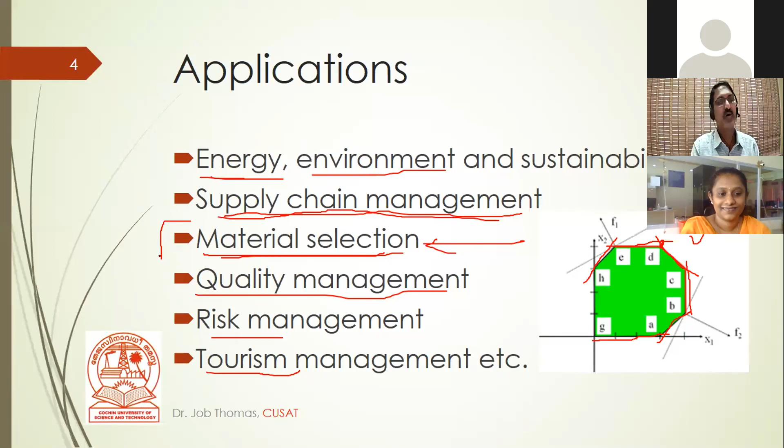Risk management, the low risk path can be identified, like your critical path method. And tourism management, the best tourist spot that needs to be approved can be identified. So there are so many applications for this MCDM, but out of this, today we will be discussing how it is used for material selection and index calculation.

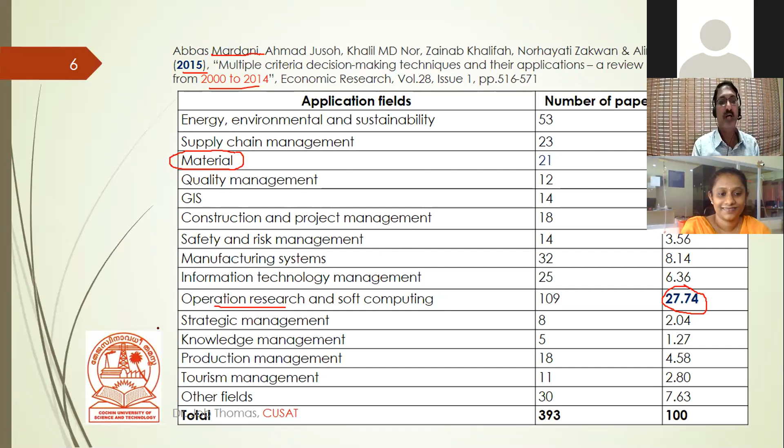And out of that, this many papers were there altogether, and 27% of the papers were in the area of operational research, like supply chain management, best route analysis, etc. In material aspects, engineers do not use this technique that much, but it is very important, especially in sustainability calculation, and that is why we have now started propagating how to calculate this score for different materials. We will discuss a case study at the end of this session, and I think you will benefit by looking into that case study.

And if you look into the literature, there are so many methods available. The very common, simplest one is the weighted sum model, then the weighted product model. ELECTRE is another technique. ELECTRE is elimination and choice translating reality. TOPSIS is the technique for order preference by similarity to ideal solution. Likewise, so many methods are available.

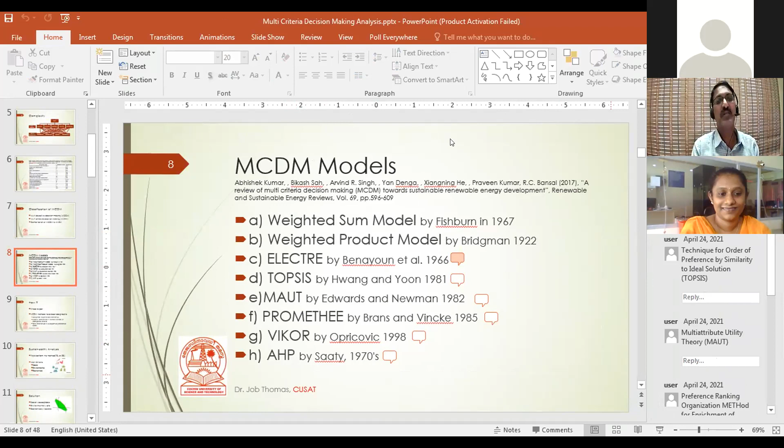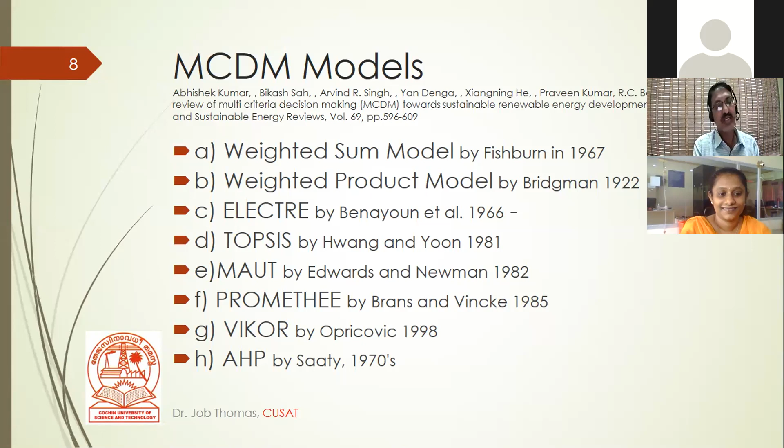At the end of the story, in all methods, you will get a score. The method of calculation is different. In some applications this method is better, and in other applications another method is better. So you can refer to these and identify the best method in your case. As we do for all problems, we go whole to part. We divide the entire problem into subparts, collect the score for the individual parts, and then assemble it, aggregate it. That is the way we proceed.

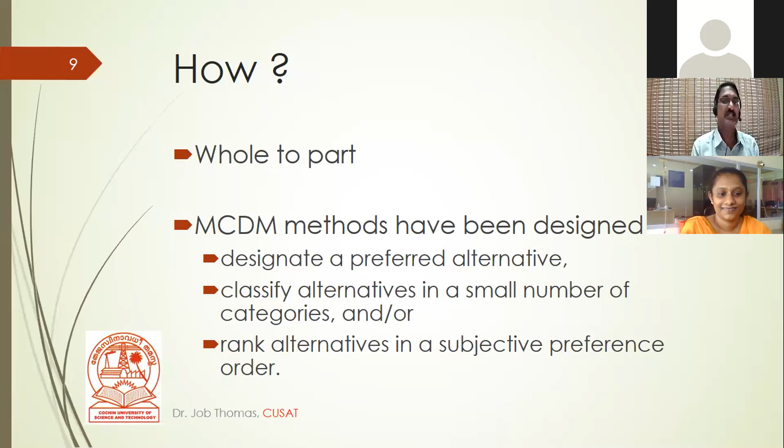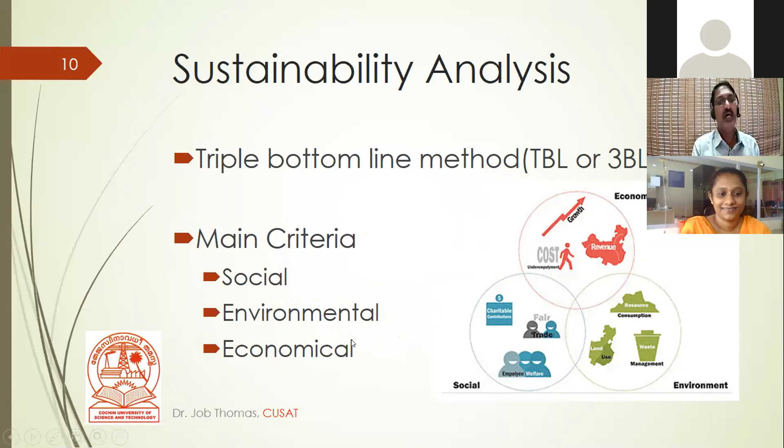In the example you will get more idea about it, and this part many people might have already discussed. Normally, we analyze sustainability based on three aspects: the social aspect, environmental aspect, and economical aspect. These three are the main criteria for any sustainability analysis. The solution is a case that is socially acceptable, environmentally safe, and economically feasible. How this is obtained in terms of a mathematical number, we will be discussing.

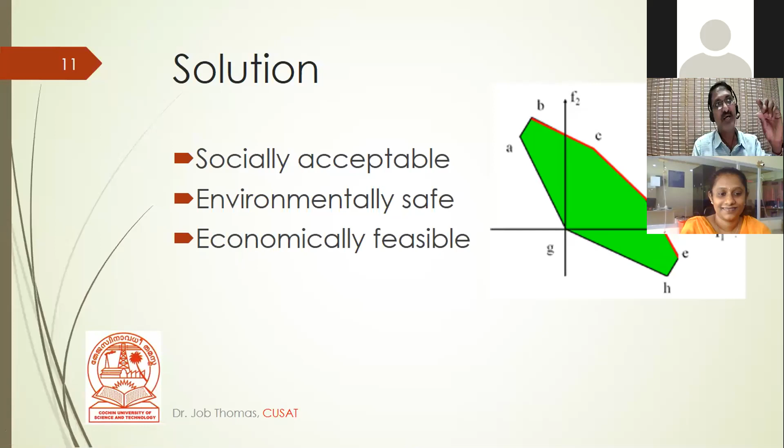This is very similar to our ANN. Many layers of alternatives will be there. You have to identify the best alternative suited for the goal. The main criteria I have already discussed: social, environmental, and economical. And for each main criterion, we require sub-criteria. And how to get the sub-criteria? The first simple method is to refer to research papers.

This is research papers. Then IGBC, Indian Green Building Council, and GRIHA, and the other option is LEED and BREEAM. So many frameworks are available. And why can't we use the same framework? That is another question. We can use the same framework when you want to do a whole analysis of a whole building. These frameworks mainly talk about the building analysis, or constructional method analysis, and the questions are arranged in that.

But when we introduce a new material, when we want to check with respect to a material which is not available commonly in all places, some of these criteria, sub criteria, or some of the questions available in the

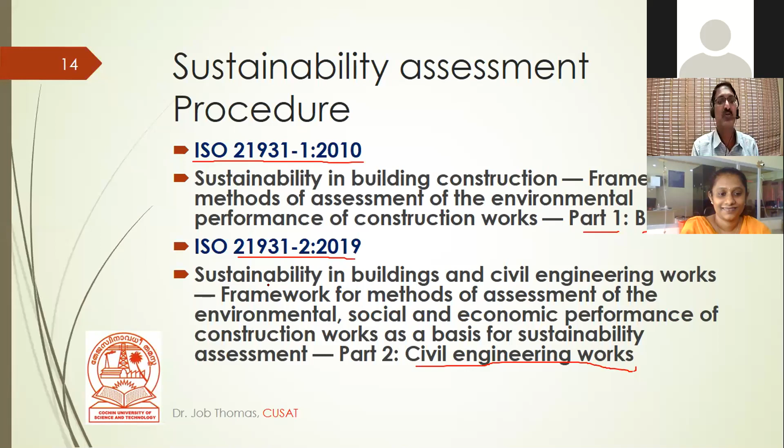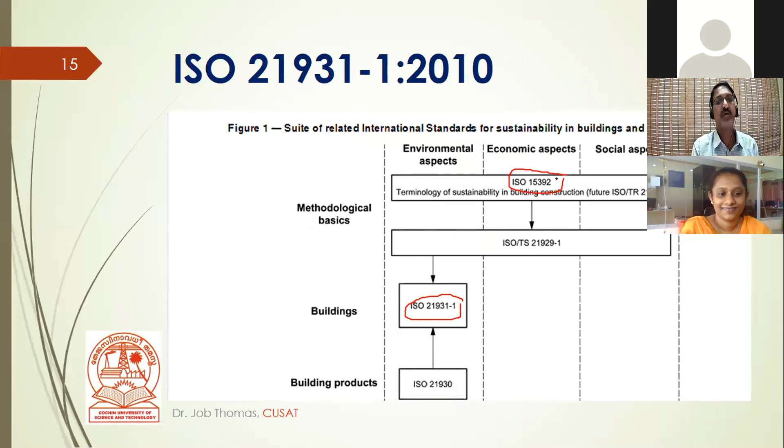ISO 21931 part 1 gives you building, and ISO 21931 part 2 gives you the details with respect to civil engineering works. So how to analyze the sustainability of a civil engineering work, different work procedures, we can do based on 21931 part 2 and part 1. Part 1 gives you building methodologies and other things. There are some other techniques; ISO 15392 can be considered. Part 1 talks about the environmental aspect, social aspect, framework, and the principles of assessment.

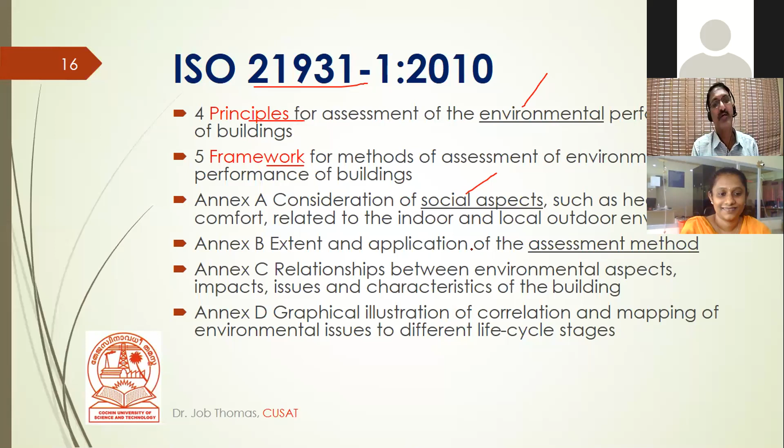And part 2, these are the topics they deal with, and that is very interesting. If you are working on the comparison of construction methods, probably part 2 will be more suitable. For comparing materials, yet another one is there, 21930, and they talk about PCR, product category rules, life cycle analysis, and environmental product declaration. If you refer to the points given in these literatures, those may be applicable for your product. If it is a new one, your product needs to be identified and utilized as a sub criteria.

So now I will be moving to my case study, very interesting. We prepared cold bonded aggregates. And I think Palanisamy was talking about this, or something else.

Different, sir, different. Is it geopolymer boards? Some part of geopolymer was there, that mixing and all. Okay, okay.

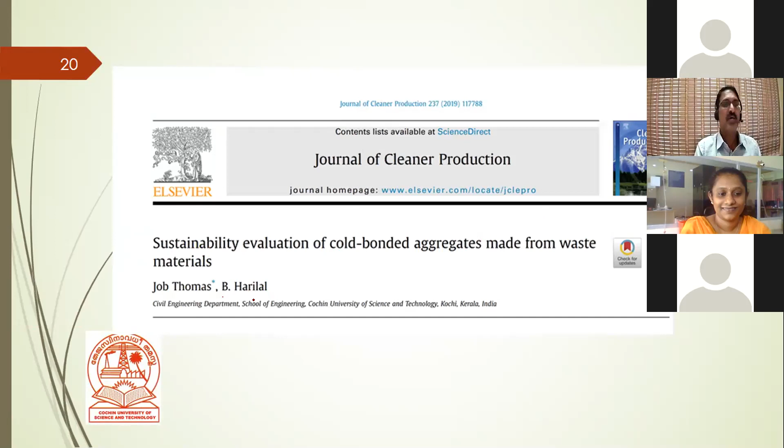So we have developed cold bonded aggregates and used them for some special applications. Cold bonding is a very simple technique, and this paper got published in the Journal of Cleaner Production, a very high impact factor journal. You can refer to it for how to do the sustainability score calculation. My research scholar B. Harilal did this work. Here also we talk about a socially acceptable, eco-friendly, and economically feasible solution. That is what we are going to evaluate, and for which we have referred to some journals.

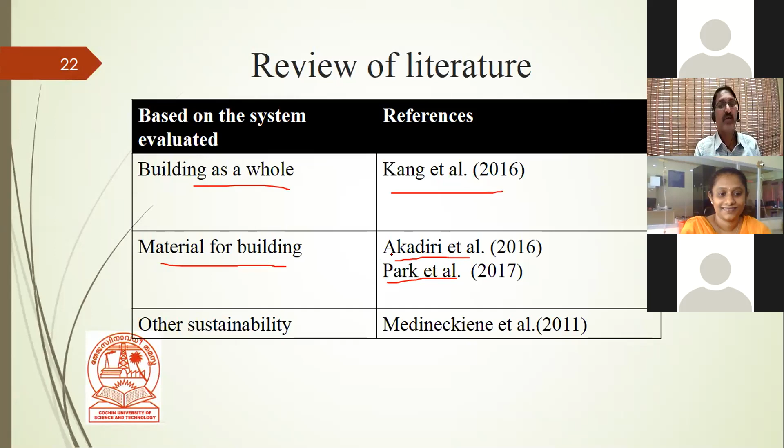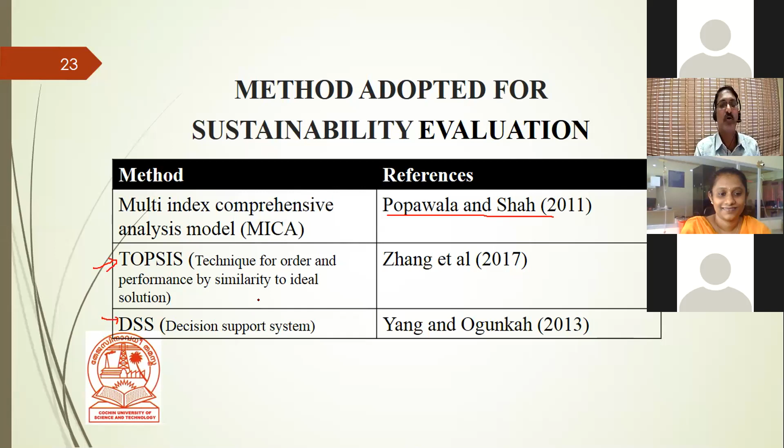For building as a whole, we have taken Kang et al., and for some other materials, Akadiri. These literatures we referred to develop the framework. There are many methods. One method is called MICA, multi-index comprehensive analysis model. It is a weighted average technique, proposed by Popawala and Shah, and it has been used in this work. In other methods, techniques like TOPSIS and DSS were also brought into this calculation.

The research significance of this work is identification of the framework for the special coarse aggregate called cold bonded aggregate, and identifying the sub-criteria for this particular framework. These are the two main things we have done. In the case study, we illustrate how this is utilized for cold bonded quarry dust aggregate.

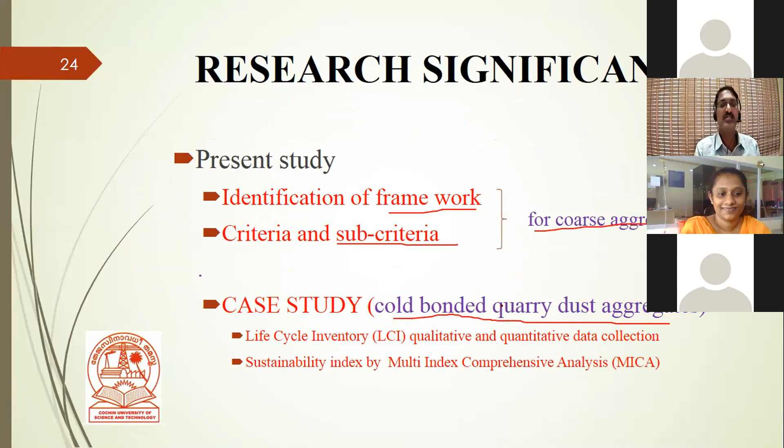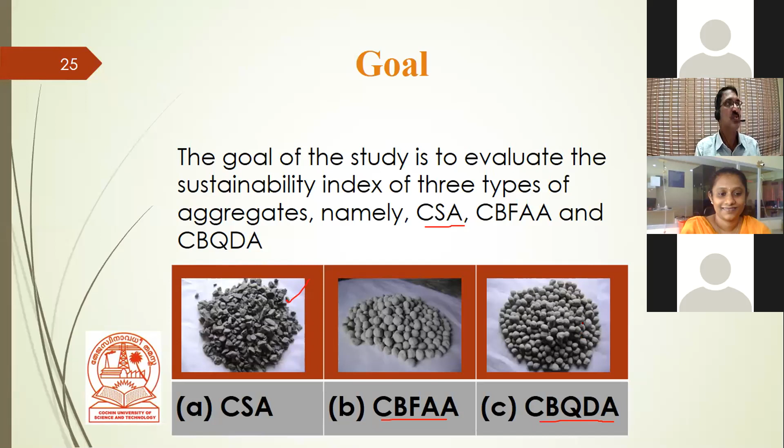Thereafter we made fly ash, cold bonded fly ash aggregate. This is the fly ash we have used for making these balls. And cold bonded quarry dust aggregate, we used quarry dust, the waste part of the quarry sand, which is washed out and otherwise used for filling land. So this waste material is used for making the balls.

In the cold bonding process, very simple. Quarry dust or fly ash is mixed with cement. Initially they are the raw materials, they mix with cement, so it's a dry mixture. During the mixing process, we spray water to it, and once you spray water, it will ball - it will form into round balls. This kind of balls will be formed.

Then we sieve it to our size, and the aggregate passing through the sieve will be utilized. If I am looking for 20mm aggregate, the aggregate passing through the 20mm sieve will be used. That balls will be taken, and the larger pieces again we will crush and put back into the mixer machine, and again spray during the spraying operation. It will form balls, and then it is air dried and then moist cured.

After air drying these balls, it is taken in a bag, in a gunny bag we stack it, and then that is put in a water tank, which we will be using for curing. After curing, these balls are used as aggregate.

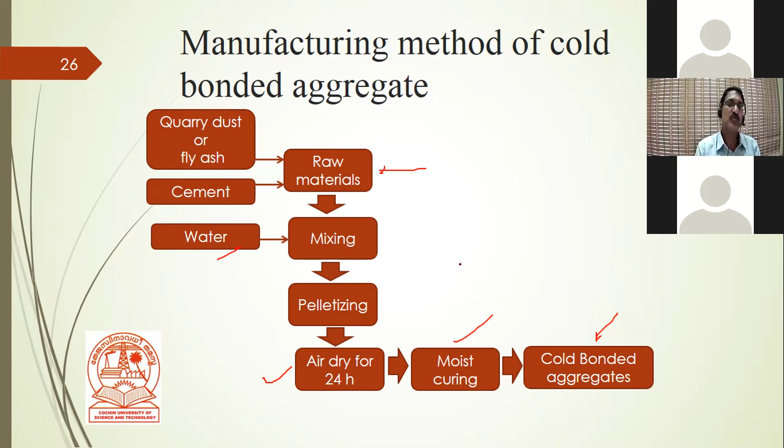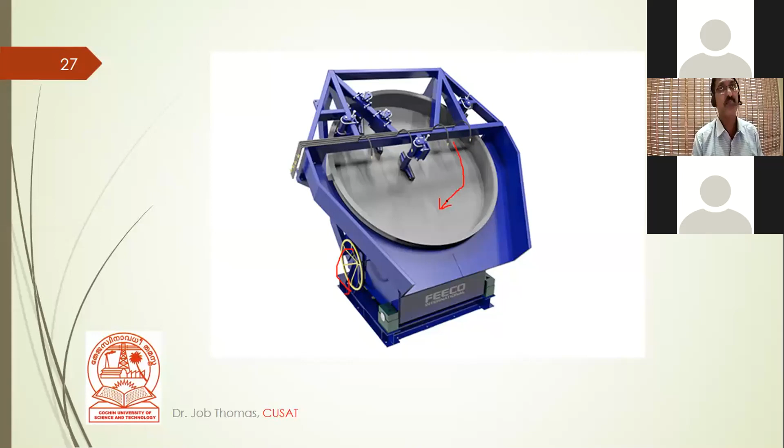This pan will be getting rotated, and if this particular equipment is not available, your conventional tilting drum concrete mixer itself will do the work. Initially we were using that concrete mixing drum in our lab, a small machine, to prepare the cold bonded aggregate.

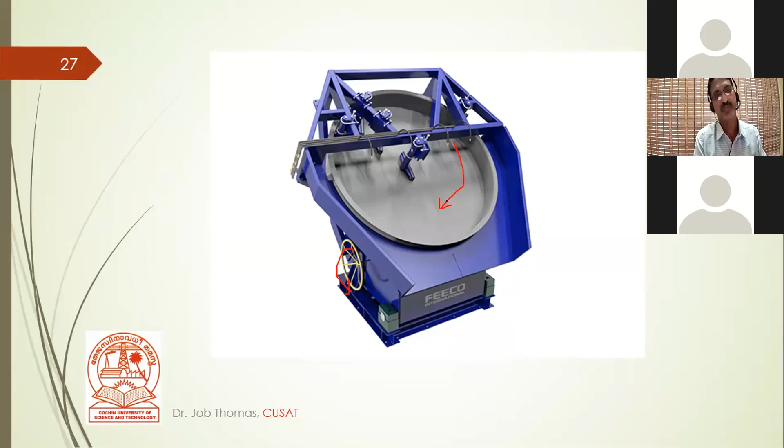What we did is - the only thing is that you cannot put load materials similar to that of concrete. You cannot fill the material and then start rolling it; it is not possible. A little quantity you can add, then roll it and prepare the balls, take it out, add a little more quantity. Likewise, you have to do it in batches. So that is important. In any sustainability index evaluation approach, first we have to define what we are going to do - that is the first step, definition of the sustainability.

I am defining sustainability like this: I consider social, environmental, and economical aspects. I am going to get qualitative data and quantitative data. Qualitative data means I am going to conduct a survey among the stakeholders, and then based on the survey, we assess the qualitative data.

If you look into recent research papers, they are more concentrating on quantitative data rather than qualitative data. Why? Because qualitative data is localized in the sense that for a particular region, respondents will give one set of answers. Data I collect here in Ernakulam may not be correct for a place in North India, or may not be appropriate for a place in Europe. So there can be variation.

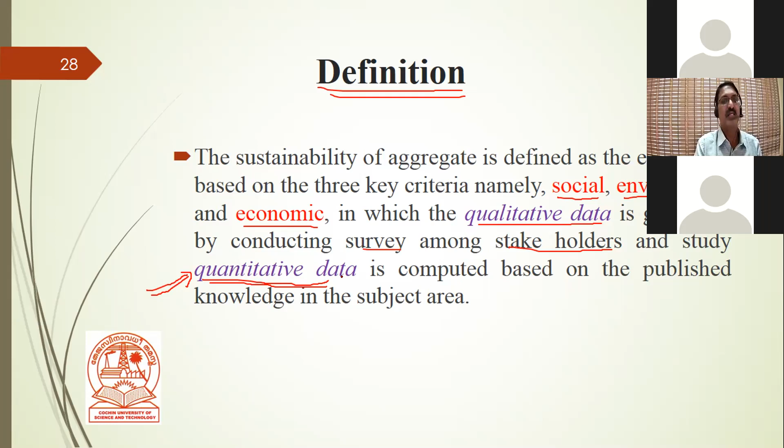What is the energy input? Like transportation energy, process energy - so many things will come in. Pollutant energy will be there. All these things need to be taken into account, and the manpower also needs to be taken into account. So these are my input data, and these are my process.

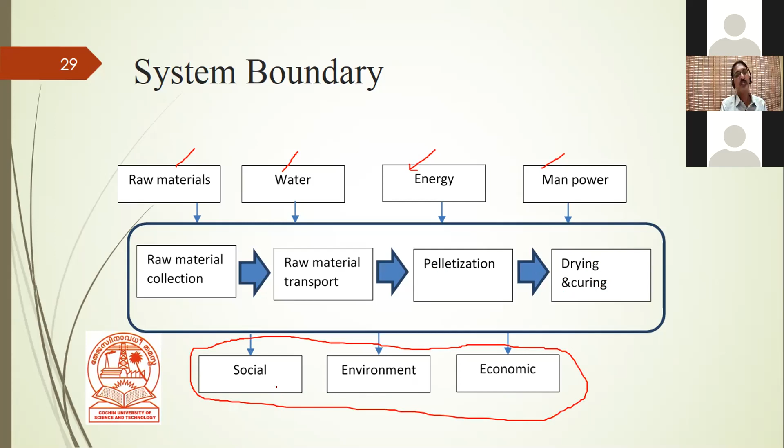Raw material collection is there. Raw material transport to a pelletizing unit. In the pelletizing unit, it is pelletized, and then I go to drying and curing the pellets. So this is the one - three aspects I am going to do: social, environmental, economical, as I have already discussed. Our triple bottom line method is used.

Since this is a new material, I could not get all the data from the same literature, LEED, or BREEAM. I may not be able to take all the sub-criteria, for which I have referred to so many other literatures. For social, I have taken 6 sub-criteria: aesthetics, health and safety, local labor in production, local materials getting used and its impact to the social aspect, raw material extraction easiness, and hazardous environment due to blasting - like in crushed stone aggregate, where blasting is required and how it affects the locality and local social aspect.

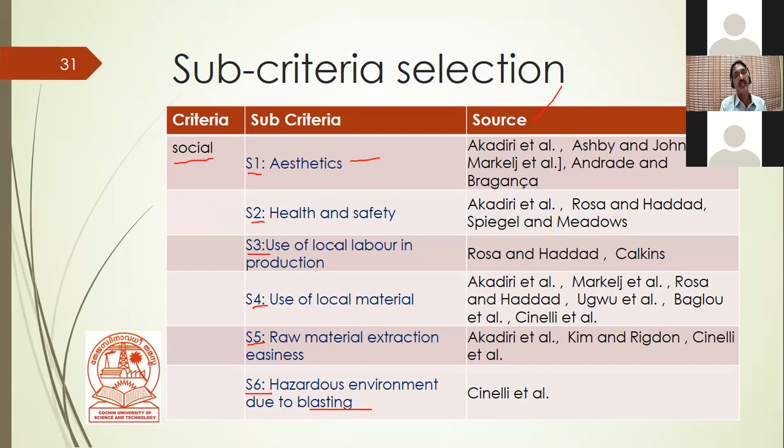So these are some literature sources for getting this sub-criteria, used here. Similarly for environmental aspect, we have considered 6 criteria, even for waste and dust utilization. The sustainability concept is: if you use more waste, that is more sustainable. And value addition of waste material - I am using fly ash or quarry dust for value addition, making it into balls and using it for concrete. Also environmental protection aspect, sound pollution, land pollution, disfigurement of land, and total energy.

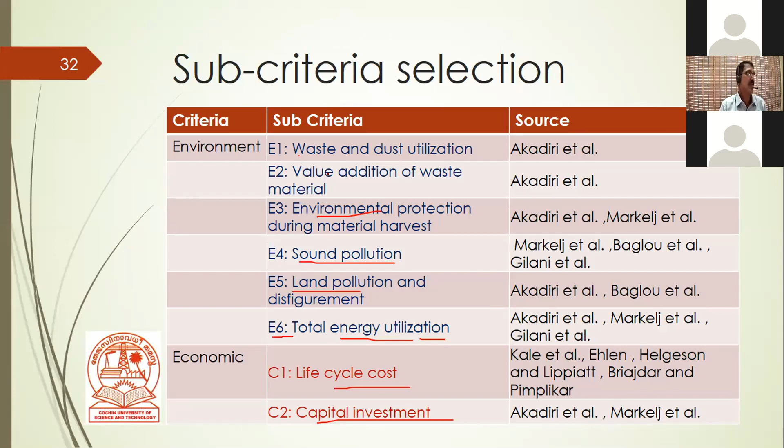Then in economical aspect, we have considered life cycle cost and capital investment. These are some of the literatures used for getting this sub-criteria. Once I got these sub-criteria as an author, as a preliminary investigator, I have to check with the experts whether this is okay - that is the next step, called expert survey.

So I am asking them to give a score for my different aspects. For social, there were 6 aspects. I asked them to give a score on whether it is relevant or not, on a 5-point scale - 1 is for the lowest and 5 is for the best, good for the sustainability aspect. Out of this, 39% of people suggested that aesthetics is okay.

It should be considered in social. And similarly, 33% of people said that health and safety shall be considered in social.

And likewise, I have got the score, and then a relative index is calculated. In relative index calculation, it is nothing but a score calculation. It is calculated based on this.

This is 5 into maximum number of people, which is in the denominator, and the score 1, 2, 3, 4, 5 multiplied by the score multiplied by the number of people who opted for that particular score. So Yi is the number of people who opted for that particular score. S is the score they marked, and S max is the maximum score, that is 5, and N is the total number of persons.

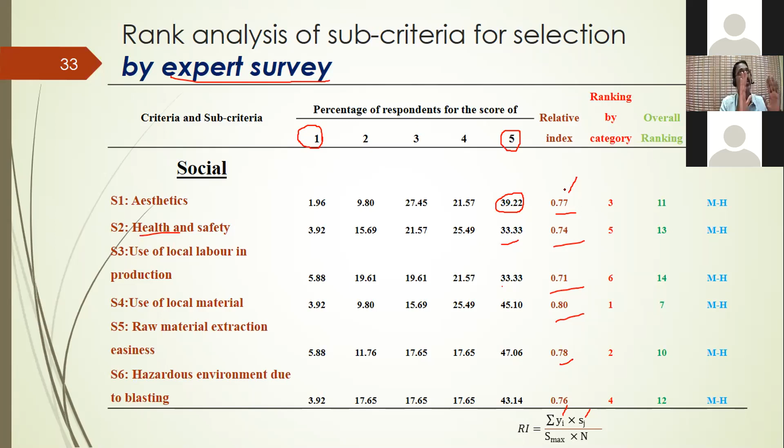So this is a plot of S1 to S6, E1 to E6, and C1 and C2. The relative index value I got, in all cases, was greater than 0.7. So I decided that these sub-criteria can be considered.

In addition, I gave a column asking if they suggest any more criteria. I checked those criteria also and tabulated them, but the value I got was less than 0.7, so those criteria were discarded since only a few people suggested them.

So that is a rank analysis based on the expert survey. That is the first phase, just to finalize which sub-criteria is considered initially.

Then the next phase is collecting data from the stakeholders. We have collected data from planning engineers, design engineers, site engineers, contract engineers, and aggregate producers. What we have done is prepared again a

Likert scale survey sheet. Since this is a new material, not everyone may know about it, so we gave a video about it, and after seeing the video, we asked them to mark their score for the particular case. So this is the stakeholders response collection approach.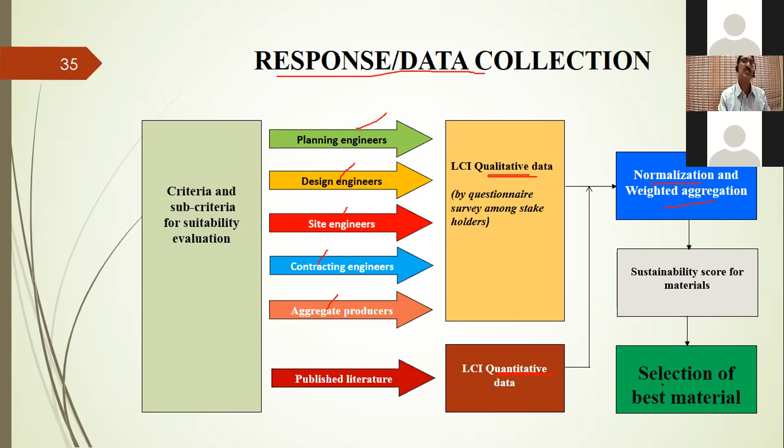After that aggregation, a score is calculated, and the item with the best score is asked to be selected. That is the choice for the client or the selection person involved in selecting the materials.

So after doing the exercise, these are the scores we got. Out of 5, for aesthetics, everyone accepted 4.46 as the score for crushed stone aggregate. And for round aggregate, some people had doubt whether

this is purely circular or spherical type aggregate, and whether these aggregates are effective inside concrete or not. Because of that, some values are slightly lower for this. These are more or less the same, 3.31 and 3.34, because both are almost

round in shape. Similarly, for other cases, S1 to S6 as well as E1 to E6 and C1 and C2, we have calculated the score. For S1 to S6 and E1 to E5, we have used Likert scale, that is LS, which is the unit given as Likert scale, 1 to 5.

Likert scale is given, and then for the other cases, energy calculation, life cycle cost, and capital investment, we have done quantitative data. We calculated it based on literature and other documents.

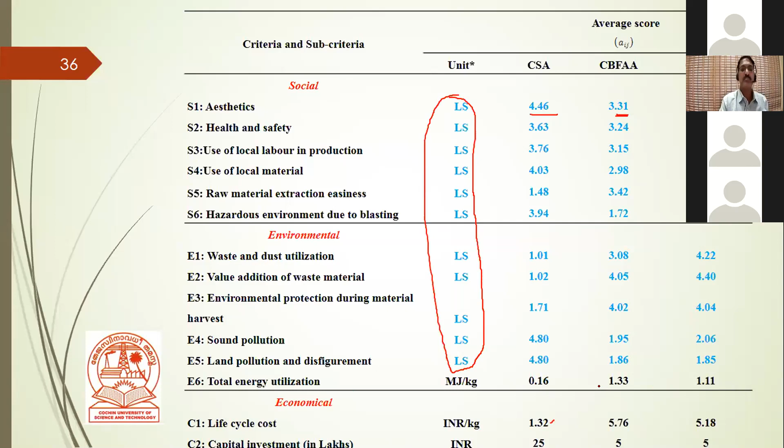So these are the details, and this is how you calculate the total energy. Total energy is equal to embodied energy plus transport energy. Embodied energy we have collected from literature and calculated this.

This is for transport energy. This is the embodied energy, the value we have collected from various literature. Details of the literature are here.

All details are available in my paper, so you can refer to my paper to get all the details. This table is also taken from that paper only.

And total transport energy plus embedded energy equals total energy, which is calculated for each and every material, like CSA, CBFAA, cold bonded quarry dust aggregate, and cold bonded fly ash aggregate.

So all the data we have calculated. This is the way we have calculated the total energy.

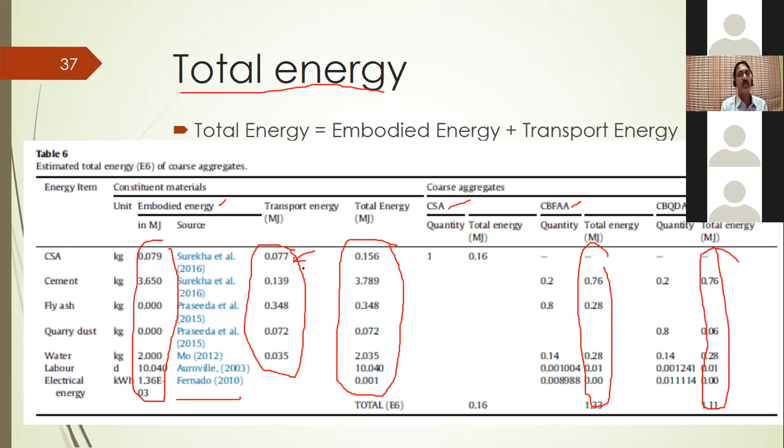Once we calculate the transportation energy, somebody may have a doubt how this transportation energy is obtained. Transportation energy depends upon the distance in which the material needs to be transported.

Based on that, we have assessed how much diesel is required for the truck to transport this, and how much quantity of material can be put in one truckload. This is the embodied energy based on the diesel, and based on that, the transport energy is calculated.

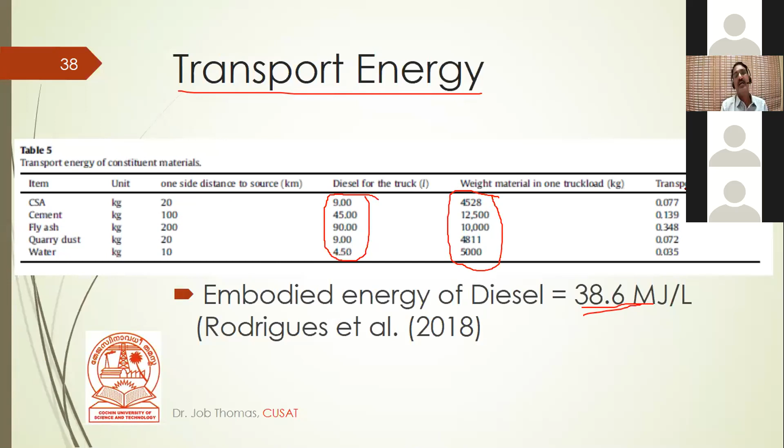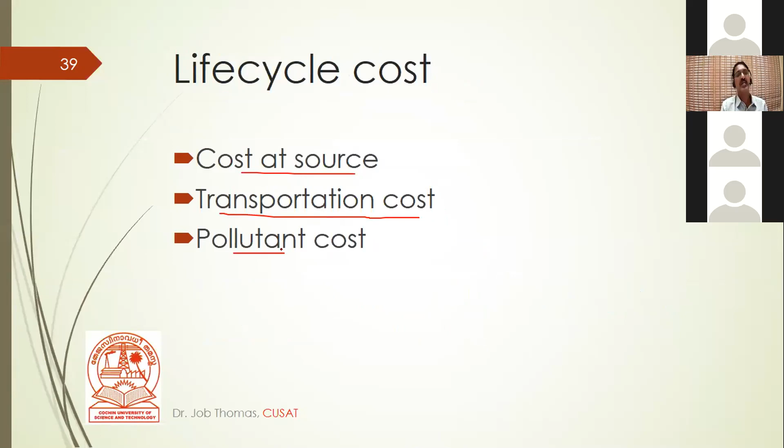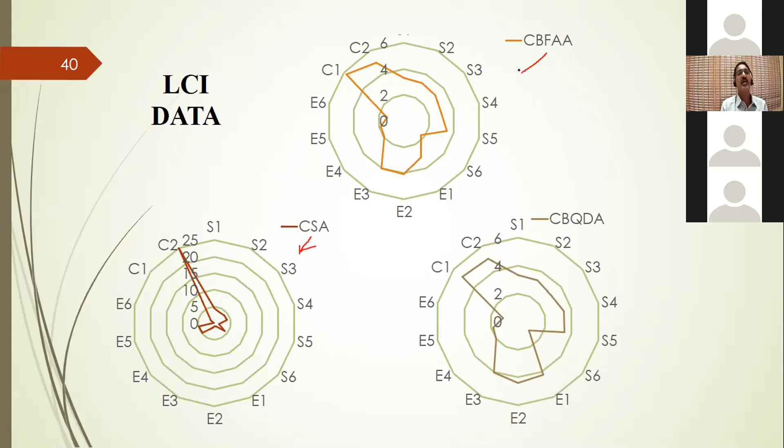And life cycle cost is calculated based on the cost at source, transportation costs and pollutant costs. The details are available in my paper. And based on that, the final calculation data, I have put it in the form of a graph. This is for CSA, this is for fly ash aggregate, and this is for the quarry dust aggregate.

And then we have done normalization. For example, in normalization, what is important? Aesthetics: highest mark is the best. That is the case of aesthetics. Similarly, in the case of pollution, sound pollution or land pollution, lowest mark is the best. So there are two cases: highest mark is the best, or lowest mark is the best. Minimum is the best or maximum is the best.

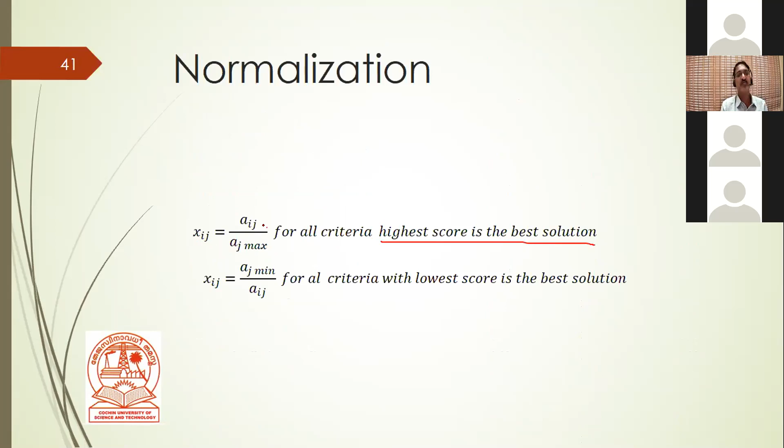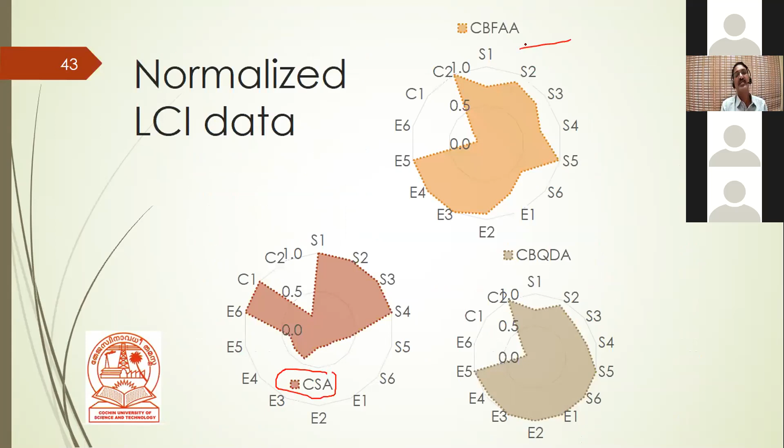So we have calculated the normalization score based on this. Highest score is the best, this formula is used. Lowest score is the best, this formula is used. So this data is normalized, and this is the normalized data for the CSA, this is for my fly ash aggregate, and this is for my quarry dust aggregate.

Sustainability index evaluation is calculated based on the weight. In my case, I have given equal weight for social, economical, and environmental. Equal weightage is given, which means the total weight is 1. So 1/3 for the social, 1/3 for the economical, 1/3 for the environmental.

And if you are very particular with respect to the calculation of weight, then you have to get the weightage given by different frameworks, aggregate them, and get the weightage for the individual case. That is also possible, so that is one method. In my case, I have used this equal weightage system, which is also very common, and many people are already using it.

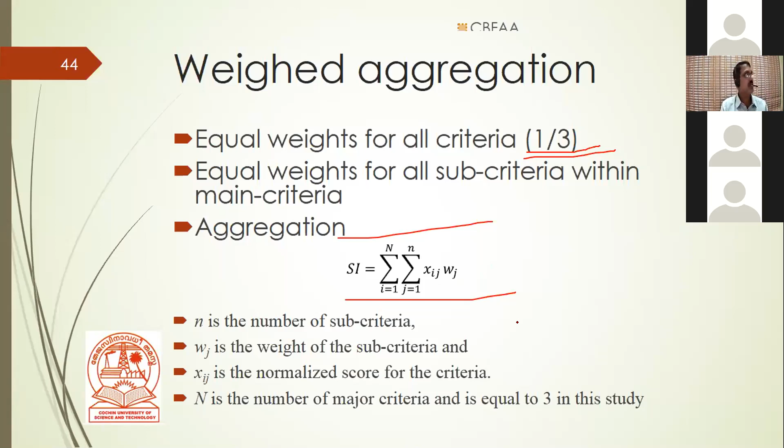Based on the equal weightage, we have calculated the weighted score. And from the weighted score, we have calculated the total score for the social. In the case of CSA, adding all these things, I get this value. Total score for CSA, total score for CBFAA. In case of social, this was the total score. Once I add these three values, I will get the total score for the particular CSA. This is for the social alone, then environmental, and this is for the economical.

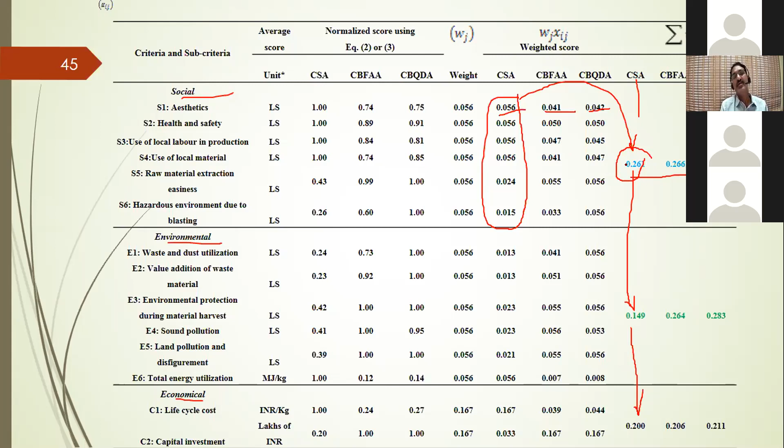So the weighted sum of the score is calculated for social, environmental, and economical, and then social plus environmental plus economical is calculated. That is my sustainability index. For CSA, it is 0.61. For the cold bonded fly ash aggregate, it is 0.73. And cold bonded quarry dust aggregate, it is 0.78.

So this is the value, and this is for social. Social is probably 0.261 and 0.266 when I consider all the social aspects. The environmental aspect is getting more value, because this is 0.149 only for CSA, and the environmental aspect is 0.26 and 0.28. Why? Because more waste materials are being utilized. So in the environmental aspect, waste material utilization is very important, especially when you do the calculation of the score.

I am recapping the calculation. You have to define your sustainability index, how you are going to calculate it. Then we have to define the system boundary. Then we have to identify criteria and sub-criteria. Then you have to get the weightage and add together. Aggregation is nothing but adding together to finalize your SI. Compare the SI and take the decision.

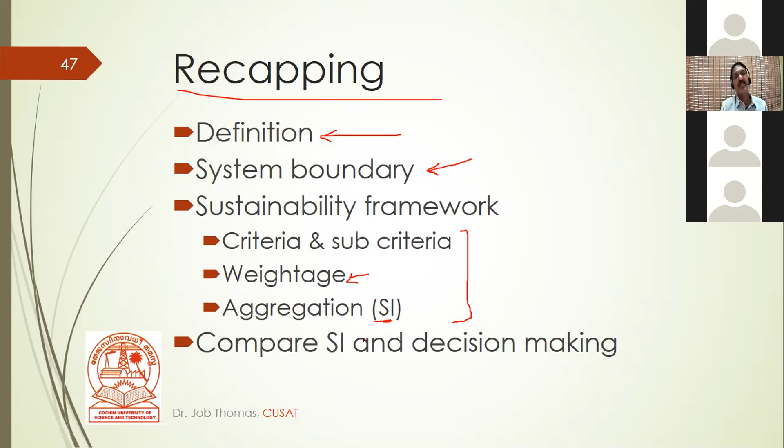In this case, the quarry dust cold bonded aggregate gives you the highest value, and this is based on the survey within my locality. This survey is conducted in Ernakulam district, and based on that we have developed this. So in summary, we have used the triple bottom line method, which is very common, we have explained the sustainability index calculation, and identified the highest sustainability material.

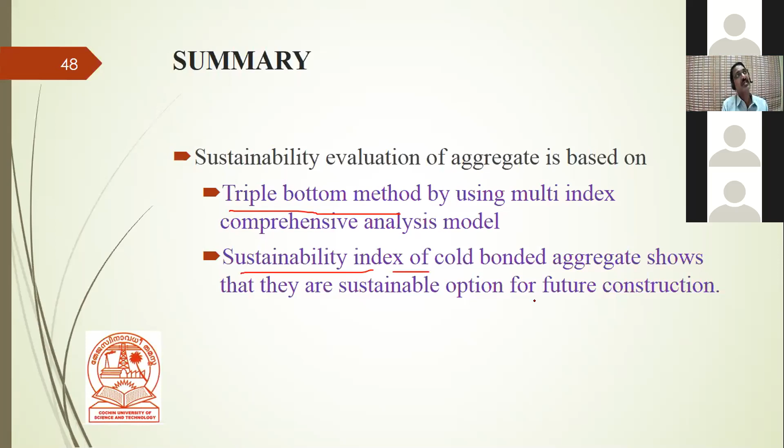This is only a technique. Okay, this is only a calculation procedure. Like this, you can compare any other three materials, the best material, like my brick, solid block, hollow block, and other possible masonry units like laterite. You can just do this analysis, calculate the sustainability index, and select the best sustainable material for future construction.

Thank you, sir. Thank you, sir, for the informative talk. Your words were full of enthusiasm and valuable knowledge. Well explained about MCDM methods, sub-criteria analysis, methods for manufacturing cold bonded aggregates and all. I hope all the participants have benefited a lot.

Oh, thank you. And whether my topic is the same as some others already presented, or something new has come in? No, sir, everything was new. Everything was new. Oh, okay. Oh, the teacher is also here. Thank you. Actually, I'm in Delhi. Oh, okay, both are in Delhi only.